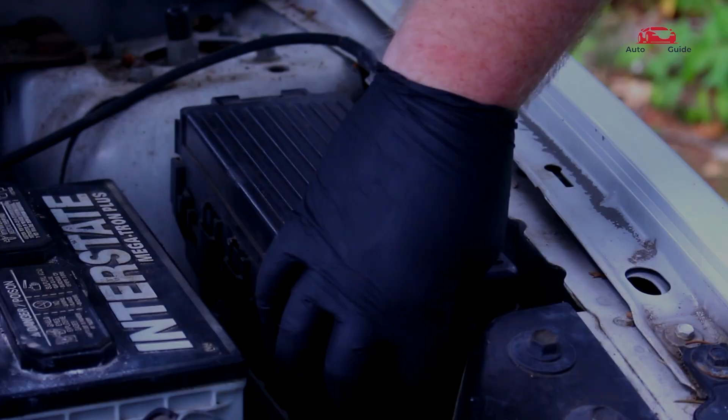Are you trying to locate the fuse box in your 2023 Jeep Wrangler? Wondering where each fuse is placed or how to read the fuse box diagram correctly? In this guide, we'll walk you through the exact location of the fuse box and provide an easy-to-understand diagram to help you identify the fuses for various systems in your Wrangler.

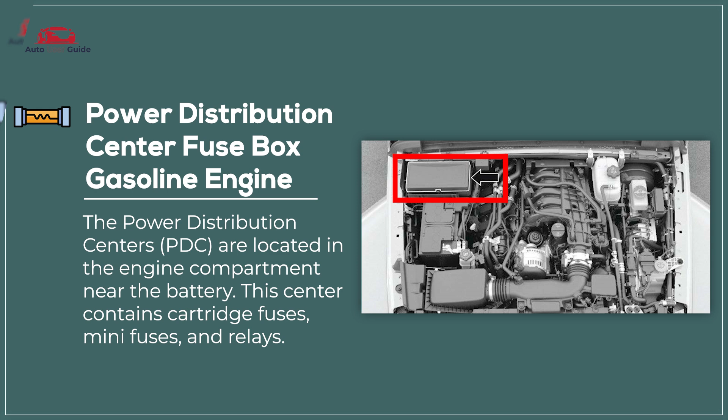Power distribution fuse box, gasoline engine. A power distribution fuse box in a gasoline engine plays a crucial role in managing and protecting the vehicle's electrical system. It houses fuses and relays that safeguard various components from overloads and short circuits, ensuring safe operation. The power distribution fuse box efficiently distributes electrical power to critical systems such as the ignition, lighting, and fuel pump, helping the engine and other essential functions run smoothly. Additionally, it is designed for easy maintenance, with a clearly labeled fuse layout that allows for quick troubleshooting and replacement when needed.

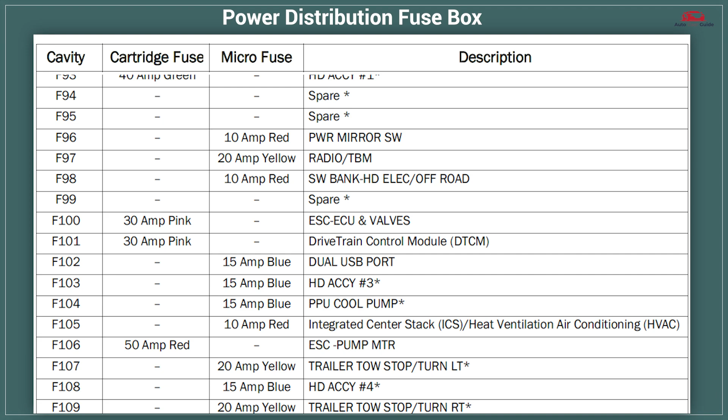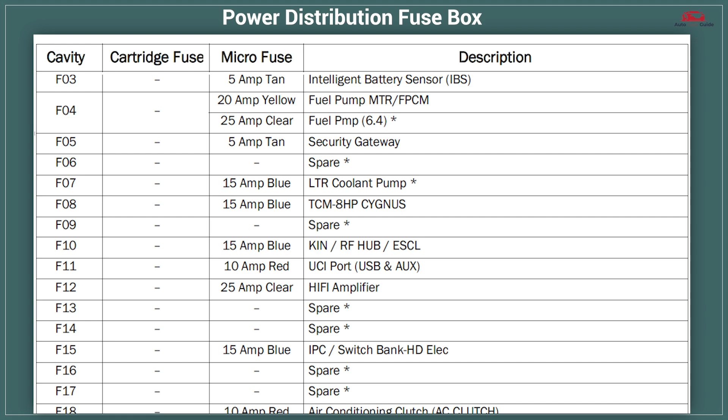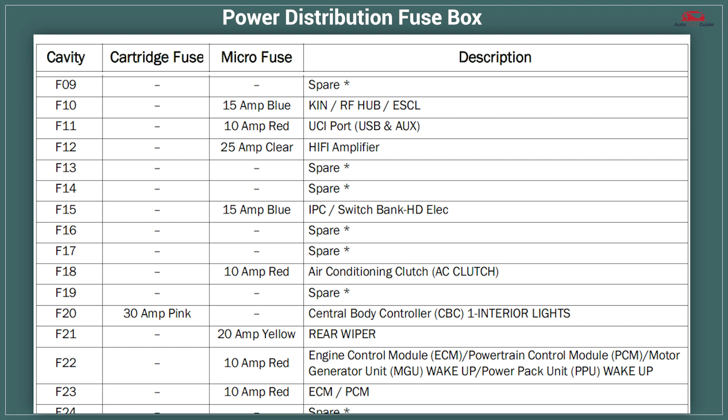Power distribution center fuse box, diesel engine. A power distribution center fuse box in a diesel engine functions similarly to its gasoline counterpart, but is designed to handle the higher electrical demands of diesel-powered vehicles. It protects critical components by housing fuses and relays that prevent overloads and short circuits, ensuring reliable operation. It efficiently distributes electrical power to essential systems such as the ignition, glow plugs, fuel injection, and lighting. Additionally, it features a well-organized, labeled fuse layout for easy troubleshooting and quick replacement, simplifying maintenance and repairs.

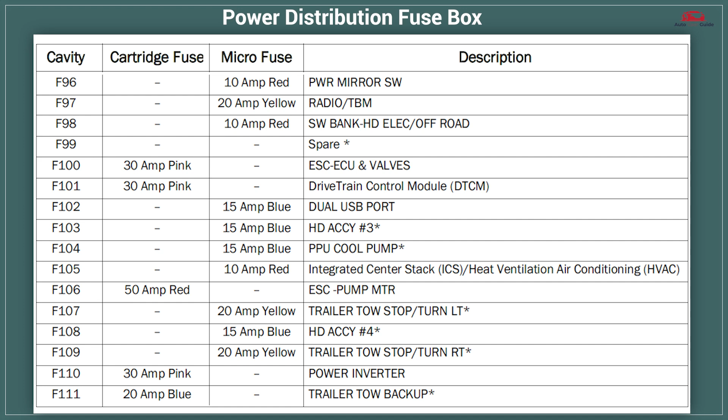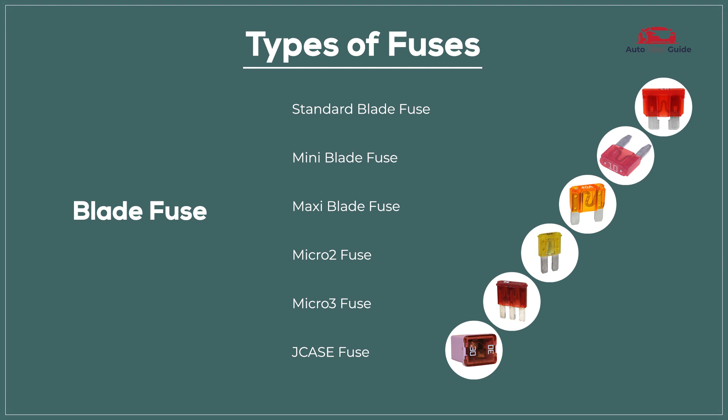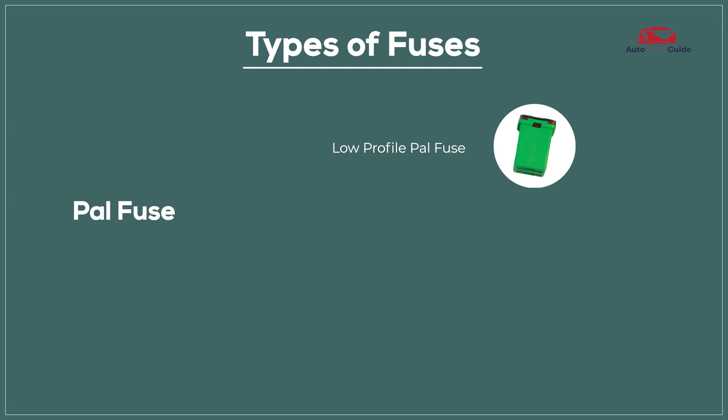Types of fuses: blade fuse, standard blade fuse, mini blade fuse, maxi blade fuse, micro 2 fuse, micro 3 fuse, J-case fuse. Glass tube fuse, AGC fuse, SFE fuse. Ceramic fuse, Bosch fuse, DIN fuse. PAL fuse, low profile fuse, standard PAL fuse. Link fuse, mega fuse, high amperage link fuse.

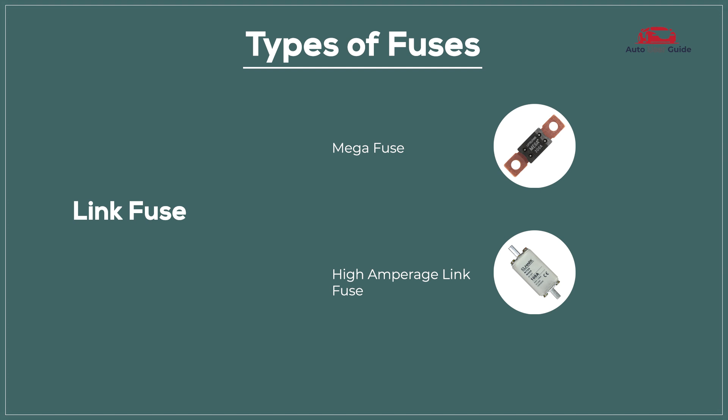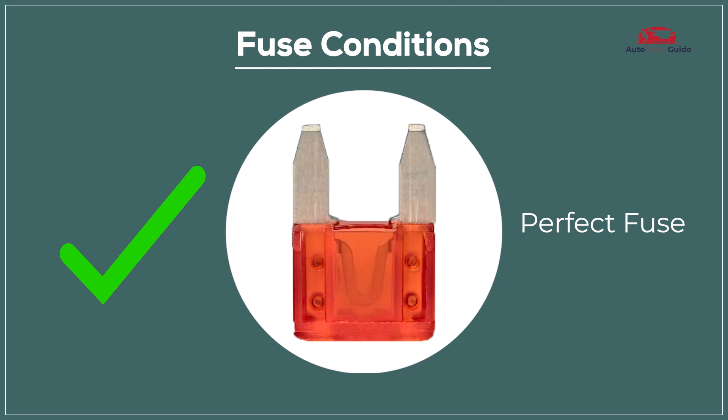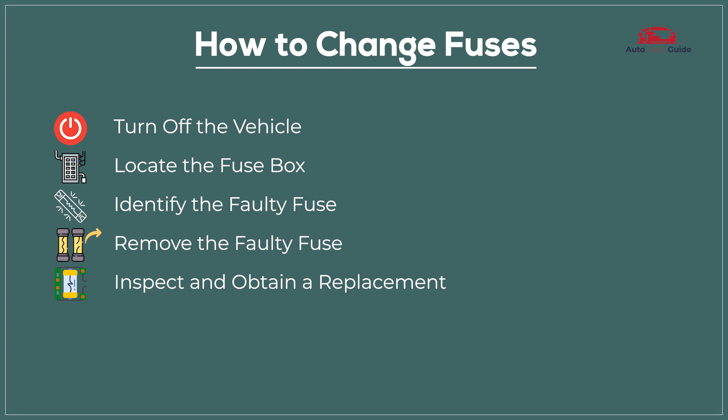How to change fuses: turn off the vehicle, locate the fuse box, identify the faulty fuse, remove the faulty fuse, inspect and obtain a replacement, install the new fuse, test the replacement.

Safety precautions: disconnect the battery, wear protective gear, use proper tools, check for correct amperage, avoid water exposure.